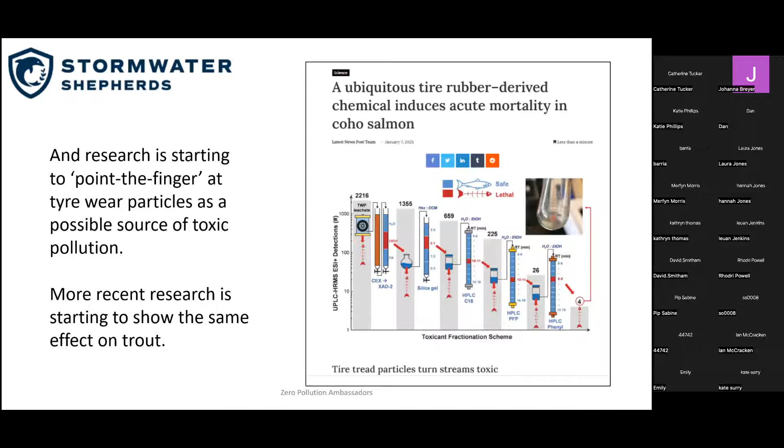So originally, there was a bit of a shoulder shrugging going on in the UK, going, well, we don't have coho salmon, but I can assure you that we do have trout. And so this particular pollution from tire wear particles is something that we need to focus on. So how does it all get into our rivers and streams is the burning question.

So this photograph is what they call concrete slip-form drainage channel. It's quite new. It was built when they did the smart motorway programme on the M6 in Cheshire. As you can see, it's a channel designed to take the water off the carriageway as quickly as possible and whoosh it into the nearest river or stream. And this was after some heavy use. You can see that we were in pretty intense congestion because the smart motorway programme was still underway.

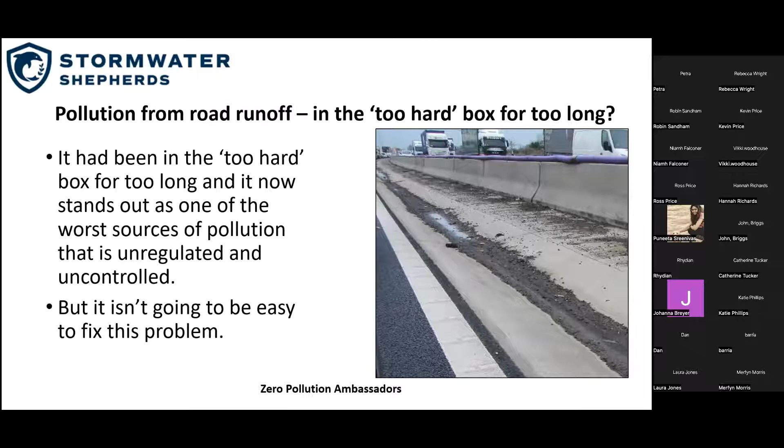And so that contamination in that channel is the contamination off the motorway surface, and it's just sitting there waiting to be washed into the river and stream next time it rains. And this particular stretch of the M6 has no treatment on the outfalls. So that pollution is going straight into the local river and stream.

This is what it looks like at the other end of the pipe, although this is a different stretch of the motorway. This is the M62 in Yorkshire, and legally, any of you who are familiar with the old Water Resources Act and the previous legislation, that is strictly a watercourse. So in law, that is a watercourse and it should sustain aquatic life. But that little watercourse carries mostly motorway runoff from the M62, and it's grossly polluted and it does not sustain aquatic life.

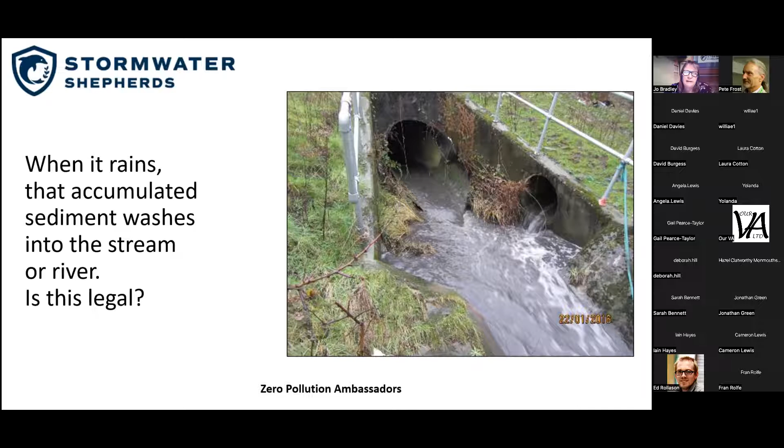So strictly that discharge is illegal, but for all sorts of reasons, there is no enforcement action taken against highway authorities, and there is no control on that discharge. There's no treatment. Just goes straight into that little stream. We were actually on site looking at the opportunities to retrofit some treatment, and that was 10 years ago probably, and there's still nothing happened.

So what's in it? Why do I care? Why do I lie awake at night worrying about this topic? Well, a lot of suspended solids is one of the answers. There's a lot of suspended solids in there. That's why it's black, because a lot of the suspended solids are associated with tire wear particles, so they give it that black discoloration.

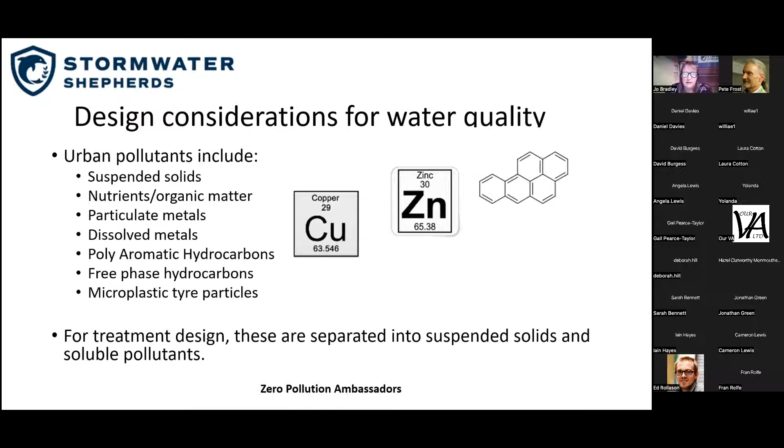There are nutrients and organic matter in there, particulate metals, dissolved metals, polyaromatic hydrocarbons, which I'll talk about more, free-phase hydrocarbons, which are the floating oils on the surface that you can sometimes see, and then microplastic tire wear particles. For treatment purposes, we separate those into suspended solids and dissolved pollutants, and I'll just describe them in a little bit more detail using that separation.

So the suspended solids are relatively easy to remove, purely because they like to rest and they like to settle out. So this is an outfall in Manchester, and this has no treatment on it. That is simply the outfall structure going into a stream. But you can see the sediment has settled out there, and indeed that black sludge is about 6 to 8 inches deep. And it's settled there just because the water has the opportunity to rest. So if you give this road runoff the opportunity to rest, the sediment will settle out, or a vast proportion of it, probably 50% at least.

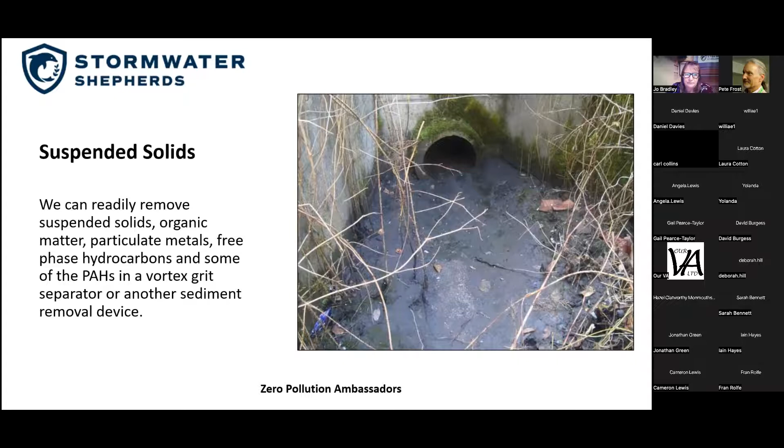And in that sediment, you are capturing quite a lot of the tire wear particles and the particulate metals and the polyaromatic hydrocarbons and a lot of the organic matter. So if you can just take out a significant proportion of the sediments, you've done a great job. It's not everything, but it's certainly a huge step in the right direction. The soluble pollutants are a different kettle of fish.

So this is a photograph of 3 bottles from a sample I took of a road in Preston in Lancashire. It's just an arterial road into Preston city centre, about 35,000 a day. The bottle on the left is just the raw sample. The bottle in the middle is simply a subsample of that. The bottle on the right has been filtered through a 0.45 micron filter.

Yes. So the dissolved pollutants are a significant problem, particularly for busy urban roads. And we just need to remember that when we're talking about designing treatment systems. The other thing to remember is, and I don't know if anybody on the call is actually a designer, but this is just something I always put into presentations because it's important, is don't fall into the first flush trap.

So when we're designing drainage systems, all across the board, drainage systems for homes and roads and factories and things, we try and treat the first flush. So we consider the first 15 minutes of rainfall, and we say it's all right because all the pollution will wash off in the first 15 minutes of rainfall. So if we treat that, we will protect the environment.

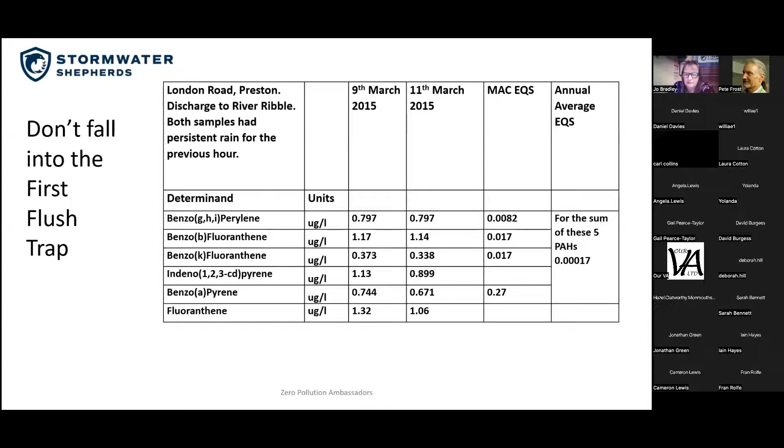But what's important is this bit. It had already been raining for an hour before we got there. So that pollution level is toxic, it's polluting, it's illegal, but it's an hour after it started raining. So for road runoff, you must always remember that your design must consider a longer period of rainfall. You must treat a longer period of rainfall. And it's worth remembering that because it's a very specific problem with road runoff.

It's to do particularly with the length of road that you're treating. So the runoff might be traveling 3/4 of a mile before it gets to the outfall, so it takes a while to get there. But also the pollution is continually generated. So when it's raining, you still have cars on the road, and so the pollution is still being generated. So it's just a heads up to remember that.

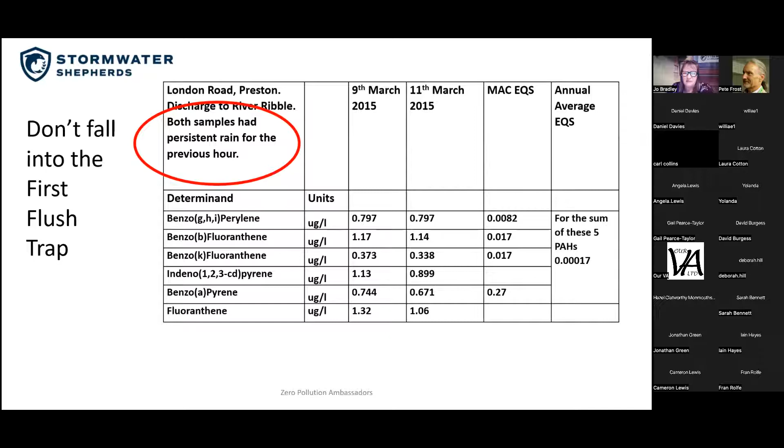So that's one device. We think there are approximately 1 million outfalls across the UK that carry road runoff into the water environment. And this is one outfall, and in 2 years, it's captured 5 tons of that sediment. Now, if that had gone into the river, it would have caused gross pollution. And on this occasion, we were lucky to capture it.

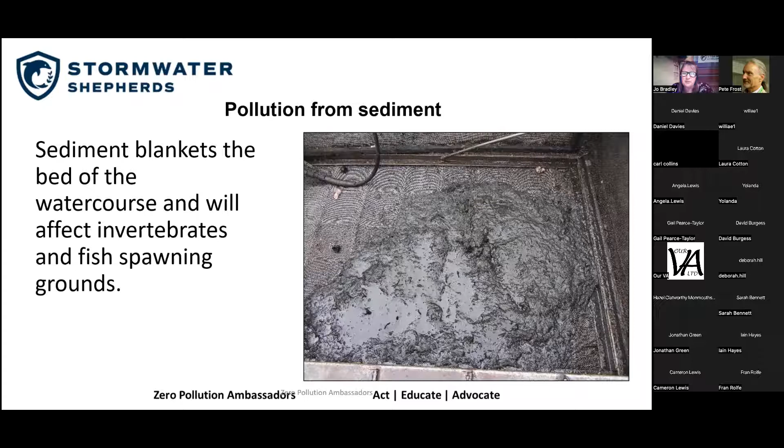So there's lots of pollution in there. I've talked about the suspended solids and I've talked about the dissolved pollution. Remember with road runoff, it's not immediately toxic. You don't get dead fish floating down the river. You don't actually get a dead river downstream. If you go in and look, you'll find insects in there. The thing to remember is it's this nasty, insidious, sublethal effect that it's having on the river ecosystem.

So it's affecting the fungi and the sediment, it's affecting the microorganisms, it's affecting the invertebrates, it's affecting the fish, it's affecting the things that eat the invertebrates and the fish. So it's just causing a failure to reproduce, it's causing a failure to thrive, it's causing deformities in species. So it's not killing things.

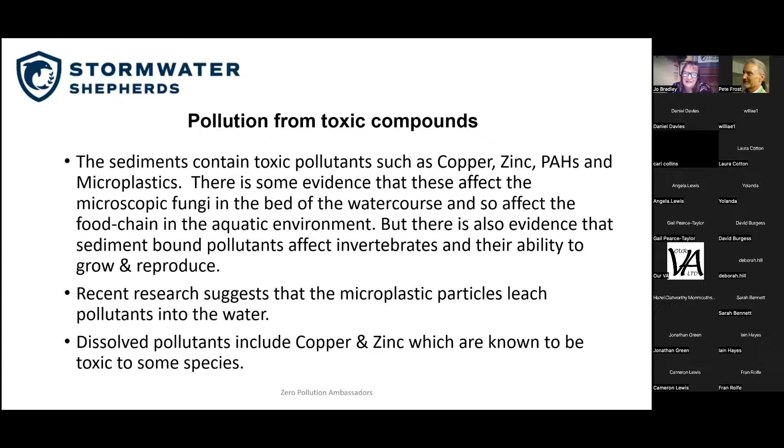So if you go in and do an insect count, you might get a reasonable result. But actually those species will be smaller than they should be and slightly deformed, and the numbers will be lower than they should be. And I think that's probably the reason why this problem has been overlooked for so long.

So swales are not appropriate for very, very busy trunk roads and junctions, motorways, or where the groundwater is vulnerable. And it's just a reminder really to remember groundwater protection, because many designers will work in areas of the UK where groundwater isn't at risk. There's 15 metres of boulder clay under the site, so they don't need to worry about groundwater. But if you move on to chalk horizons or limestone horizons, then you do really need to start to think about it.

But let's talk about solutions. Let's not all be doomy and gloomy. Let's consider what we can do about this. There are lots of solutions. There are sediment traps. So we talked about sediment. We said how important it was to get some of the sediment out. And I said how easy it is to get sediment out, because you just have to allow the water to rest. So this is a sediment trap in Exeter.

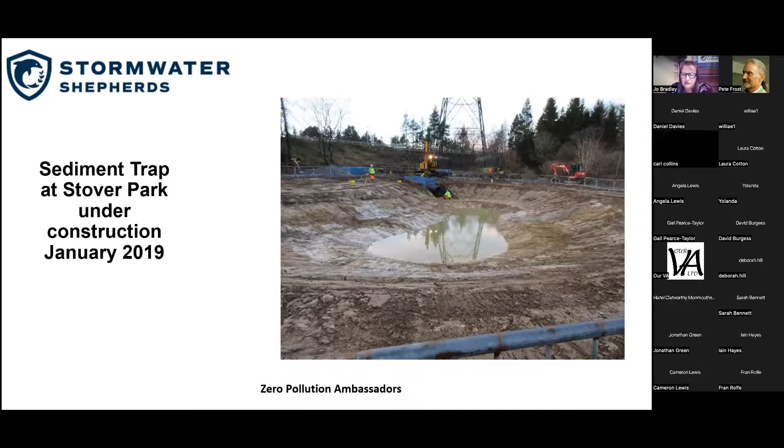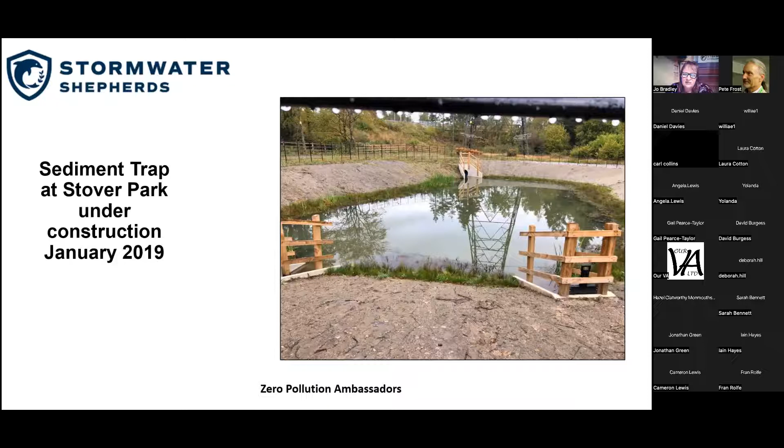It's huge. It was built by National Highways. It takes the runoff from, I think, the A38, and it's a roundabout, so it's a busy, busy junction. This was during construction. This was post-construction. So this device is designed specifically to settle out the sediment, where they can easily get to it with a big tanker, and they can take that sediment away every maybe 2 or 3 years. It's a solution. There are reasons why it's not an ideal solution, but nonetheless, it is an effective solution.

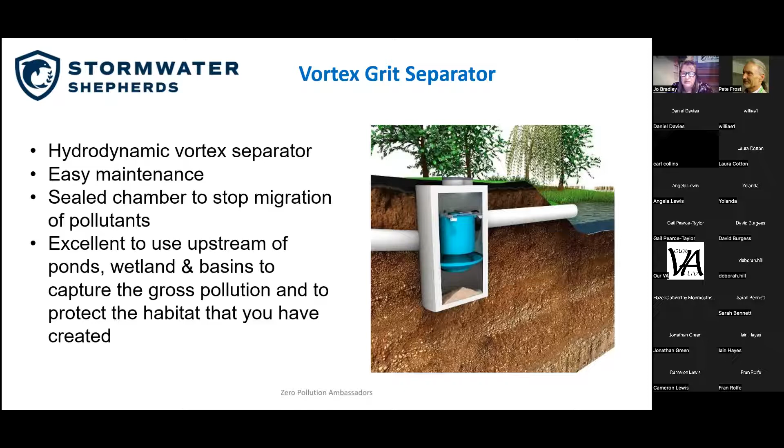This is a Vortex grit separator, which is a subsurface device that you buy. It comes on site ready to go, plug and play. Excellent workhorse for stormwater treatment. It causes the runoff to go into a vortex, a bit like your Dyson cleaner. So the sediment settles out at the bottom and the water passes forward to a pond or a basin or whatever. And it takes out probably 50 to 60% of the gross pollution in the runoff. It's an excellent opportunity to capture the worst of the pollution.

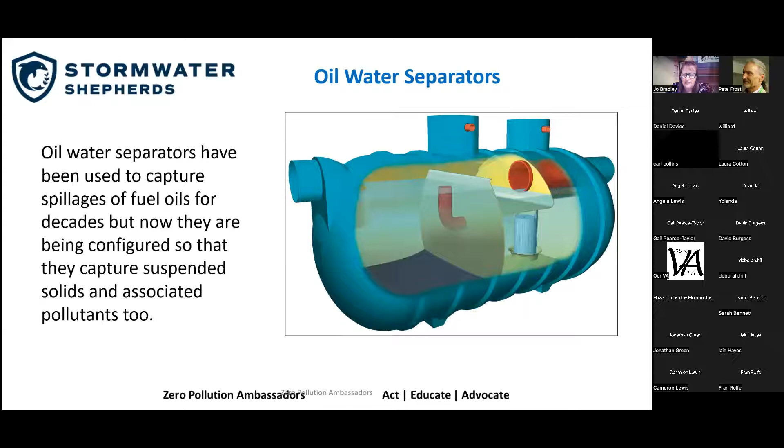Equally, an oil water separator does pretty much the same thing, but in a slightly different way. This is bigger, so it just allows the water to rest so the sediment settles out. And again, it's easy to get to with a vacuum tanker, and you take that sediment away and you've removed it from the water environment.

Filter drains are lovely. I love filter drains. These are good for roads because they're a linear device. In fact, I've got another slide in a second. Just let me put this slide up first. The reason they're so good is that because it's a linear device, you've got a huge treatment capacity. So if you put a Vortex separator at the end of a pipe run, you might have 30 cubic meters of treatment capacity. But if you put a filter drain along a roadside, you will have hundreds of cubic meters of treatment capacity, just because you've got that length of filter drain down the whole side of the road.

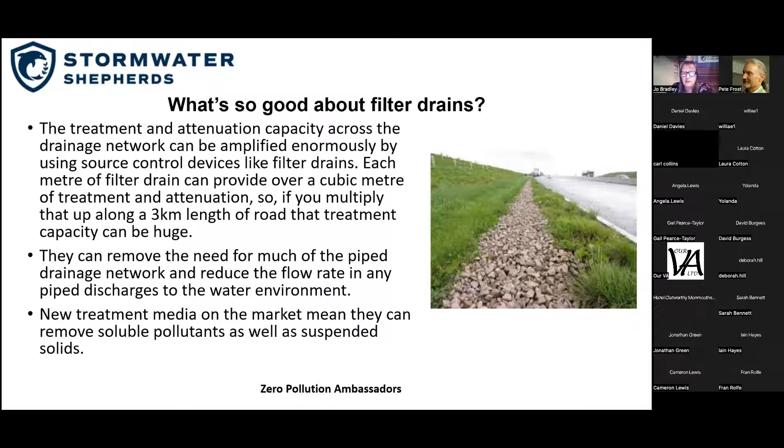So they're an excellent option, particularly on new roads. There's no excuse not to include them, but they can be an excellent option for retrofit as well. Just to go back to how they function, the sediment is captured in the stone layer. So in the spaces between the stones, you might have a metre depth of stones. The sediment is captured in there.

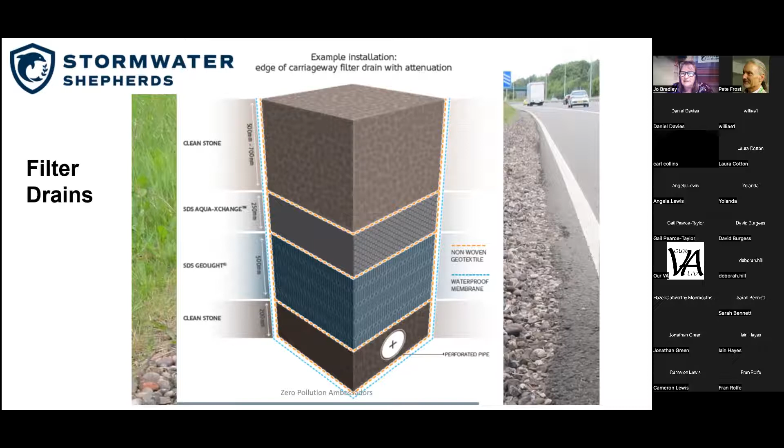And then under that stone layer, you can have a layer of treatment media. In this example, it's a product called SDS Aqua-Xchange, but there are others on the market, and that captures the dissolved pollutants as well. So within that filter drain, you're taking out the sediments, you're taking out the dissolved pollution, you're attenuating the flow, so you're reducing flood risk, and you are creating a safe device at the side of the carriageway. So they're an excellent solution for roads.

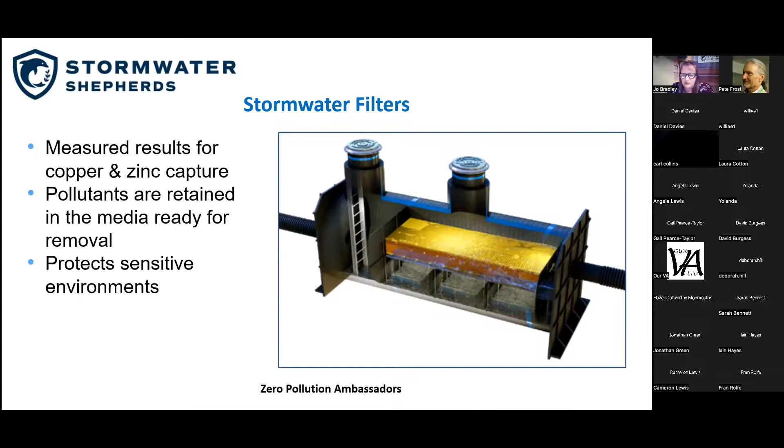Stormwater filters, when we move on to looking at dissolved pollutants, which I talked about earlier, stormwater filters are a good option. We don't use them very often in the UK because it's unusual to need to capture the dissolved pollutants as well. Interestingly, I think the only example I'm aware of these being installed, particularly for water quality protection, is a school in Wales, a secondary school, where they installed one of these filters to capture dissolved pollutants before they went into the stream, because the stream was very, very vulnerable. But they certainly exist. There are these ones which are downflow filters, and these ones which are upflow filters, and they capture the dissolved pollutants. So they are available on the UK market.

But saying that, another way of capturing your dissolved pollutants is in vegetative devices. So ponds, basins, wetlands, swales, bioremediation zones, tree pits, all these vegetative devices, which I'll show you in a moment, they capture some of those dissolved pollutants too. And obviously they also deliver all those lovely benefits. So habitats for wildlife, green spaces in city centres, nice places for people to spend time. So the vegetative devices are often preferred because of the multiple benefits they deliver.

So I would argue for busy roads and trunk roads, you need a manufactured device first and then a vegetative device. And for less busy roads, you can just go straight into a vegetative device, which will deal with all your pollution concerns. So can retrofit SuDS in urban areas help?

Yes, they're brilliant. And we've got masses of examples across the UK where retrofit SUDs have been included as part of street improvements or roadworks or junction improvements. And local authorities have taken that opportunity to retrofit some SUDs in there to capture the runoff, to reduce flood risk locally, to improve the aesthetics of the area, or to reduce water pollution, or to do all of those things. So there's lots of examples. I'll show you a few in a moment.

It's very interesting because some local authorities do lots of this, some local authorities do less of this. But I think as Schedule 3 unfolds in England, and obviously Schedule 3 embeds more firmly in Wales, we'll start to see more and more retrofit SUDs. They reduce storm overflow discharges and they reduce pollution, and they can be really beautiful.

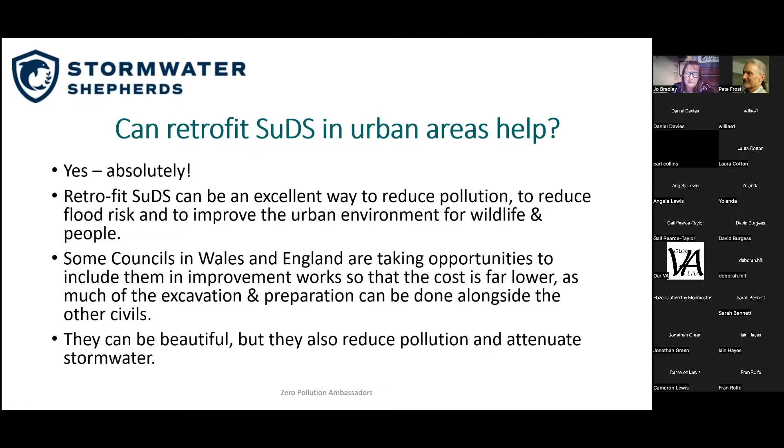And actually interesting, two of them had moved down to Cardiff from Lancashire because they were so pleased with Cardiff and they enjoyed living there so much. So that made me feel, I come from Lancashire, so I was a bit wounded.

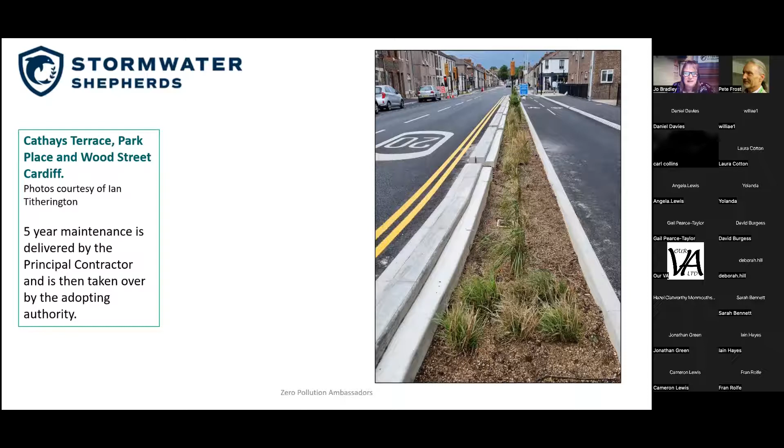Again, newly planted, so not quite looking as gorgeous as they will, but they will look gorgeous when they're finished. This is, I think, Cathays Terrace, and then this one is Park Place, and this is a basin, so this will be magnificent. This will be a wetted environment for amphibious species and insects to live in once it gets going and all the plants have got going.

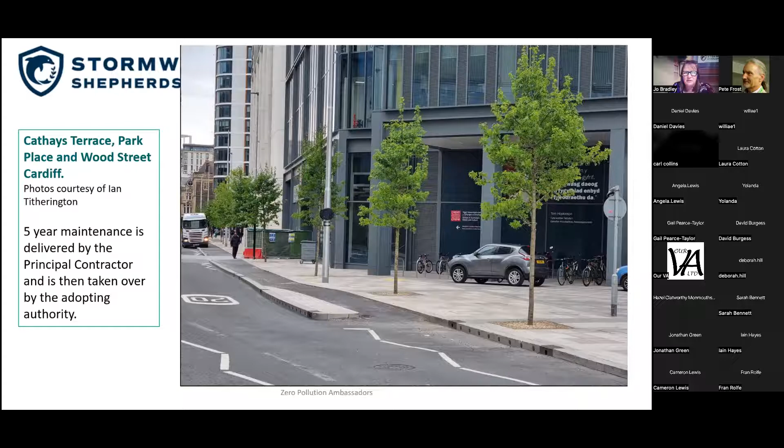And this is Wood Street, just tree pits. I think tree pits are very smart for commercial areas like this. They do exactly the same thing, but most of the action happens underground. And these will all be maintained by the principal contractor for 5 years to make sure that they work, and then they'll be taken over by the adopting authority, which will be Cardiff City Council in this instance.

So do we do this? Yes, we do this. We do this as soon as we can, and we do as much of it as we can. They make a huge difference. It can be a small additional cost if you piggyback on an existing scheme. And so there's no reason or excuse not to do more retrofit SUDs as fast as we can.

Thank you, Pete. Sorry, I ran over a little bit, but I hope we've got time for questions. Oh, thank you so much, Jo. I wonder if you could make me the host again, and then I'll try and ringmaster the questions. Yep, there you go. Brilliant. Thank you so much for that. Like I say, I learned more in that hour's conversation with you than I had done in the previous 30 years. And this is only added to my knowledge. Brilliant. Fantastic. I wonder if I could ask Laura Cotton to unmute her microphone and video and to ask the question that you posted in the chat. Laura. Oh yeah, video on. Videos. Oh, it's coming. Yeah, hi.